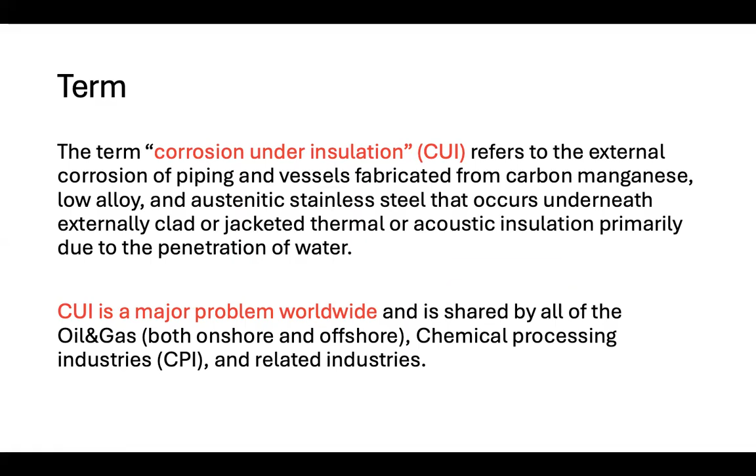Okay, corrosion under insulation is a major problem worldwide, and it is shared by all the oil and gas, chemical processing, related industries, and nuclear facilities as well. Corrosion under insulation has been responsible for many major leaks that have led to safety, health, and environmental related incidents, to loss of production, and is responsible for large maintenance budgets. So we need more budget if there is a possibility of how to manage corrosion under insulation.

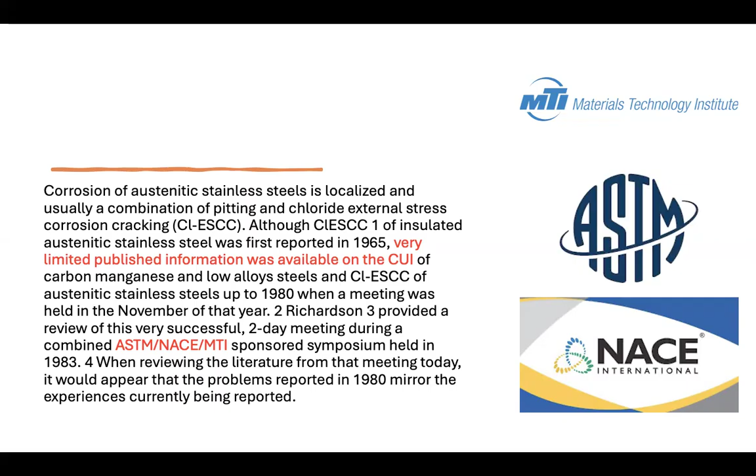Okay, maybe some of you already know, on the right side here, the standards from ASTM, American Society for Testing and Materials, MTI, Materials Technology Institute, and NACE International, National Association of Corrosion Engineers. Before the 1980s, there was very limited published information about corrosion under insulation. But right now there is so much information we can get, not only from the ASTM, NACE and MTI standards, but also from other journals, books and standards.

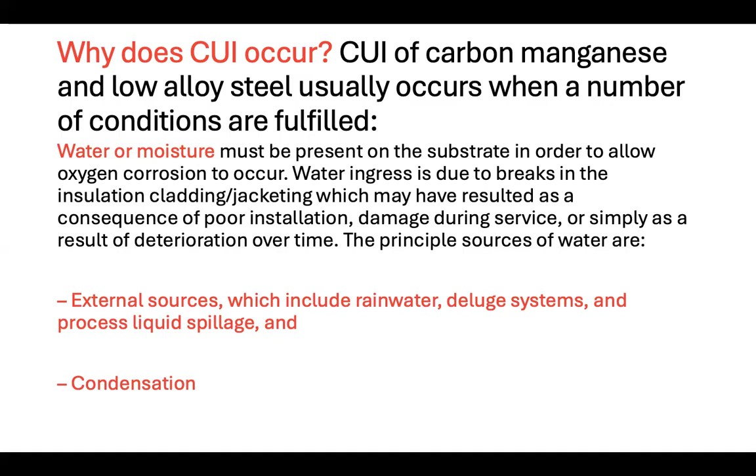Okay, why does corrosion under insulation occur? Corrosion under insulation of carbon manganese and low alloy steel usually occurs when a number of conditions are fulfilled. Water or moisture must be present on the substrate in order to allow oxygen corrosion to occur. Water ingress is due to breaks in the insulation cladding or jacketing, which may have resulted from poor installation, damage during service, or simply deterioration over time. The principal sources of water are external sources, which include rainwater, deluge systems, process liquid spillage and condensation.

Okay, generally, corrosion under insulation is classified into one of four categories. The first one, low temperature. The second one is sweating service. The third, high temperature. And the last one, cyclic temperature. All four corrosion under insulation categories are influenced by location or geography and prevailing local climatic conditions.

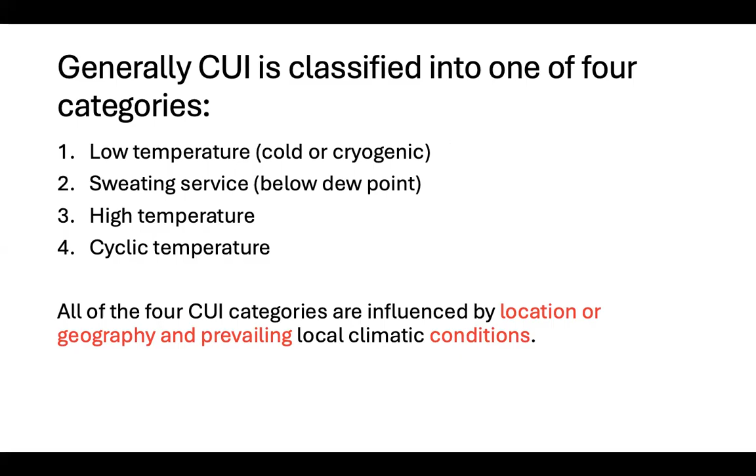Okay, the operating temperature range of the piping or vessel should be between -4 and 175 degrees Celsius. The insulation type may only be a contributing factor, because corrosion under insulation has been reported under all types of insulation. However, the individual insulation characteristics can influence the rate at which corrosion under insulation occurs. These include the presence of water leachable contaminants, water retention, permeability, and wettability of the insulation, any residual compounds, annular space, possible absorption of water, and possible contribution of contaminants that accelerate the corrosion rate.

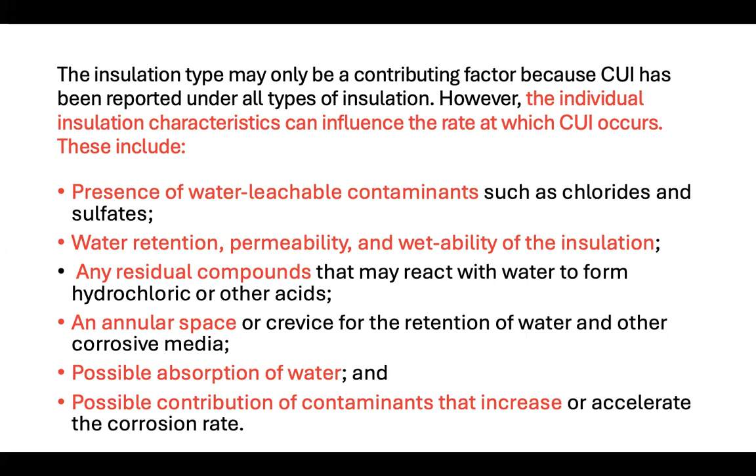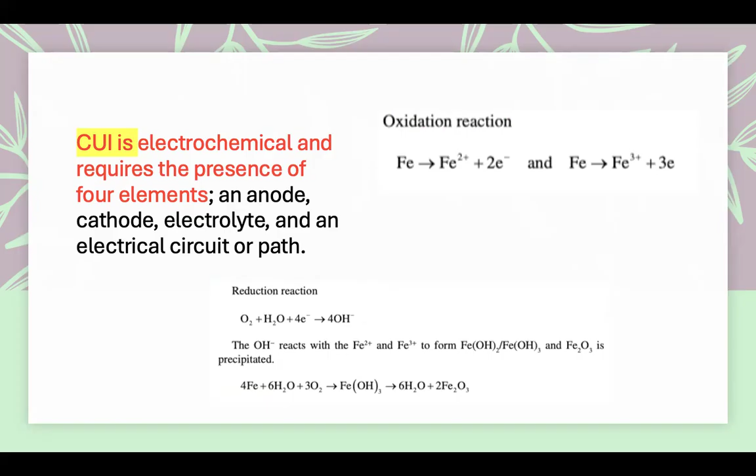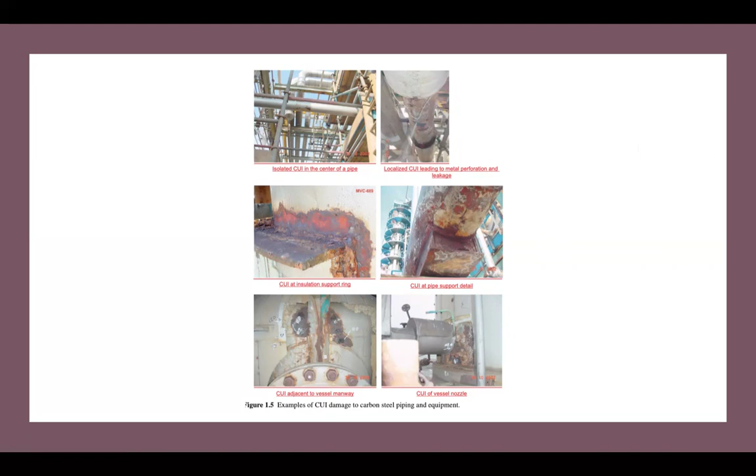Okay, what is corrosion under insulation? It is electrochemical and requires the presence of four elements: an anode, cathode, electrolyte, and the electrical circuit or path. This is the basic oxidation and reduction reaction. These are some pictures of corrosion under insulation damage in carbon steel piping and equipment. In the picture below, this is the insulation. They opened it and found a lot of corrosion here. This is an example of corrosion under insulation damage.

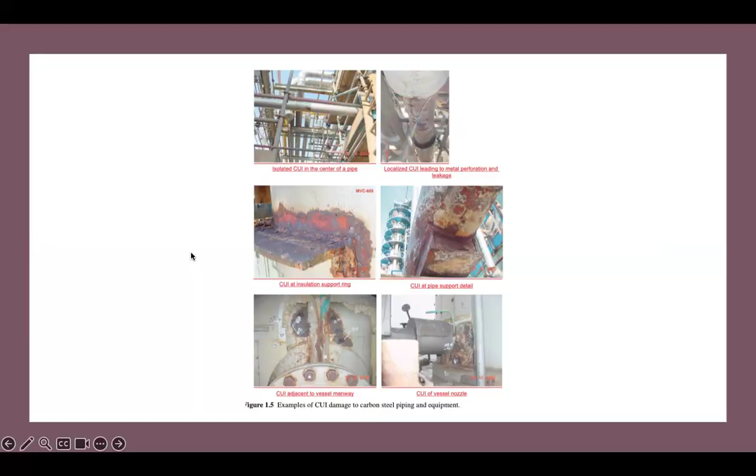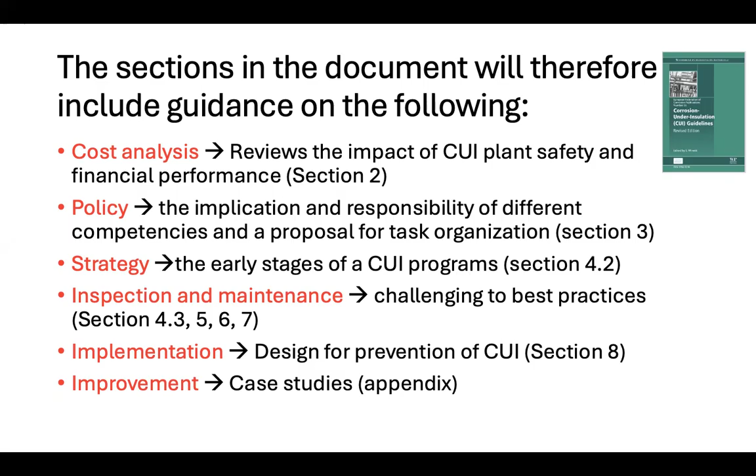Okay, this section in chapter 1 includes guidance on the following. The introduction in chapter 1 gives us information about cost analysis, reviewing the impact of corrosion under insulation on plant safety and financial performance in section 2, and tells us about the policy, implications and responsibility, the strategy, programs in section 4.2, inspection and maintenance in sections 4.3, 5, 6, and 7, and implementation of design for prevention of corrosion under insulation in section 8. The last section gives us information about improvement. It will be discussed in more detail in the appendix case studies.